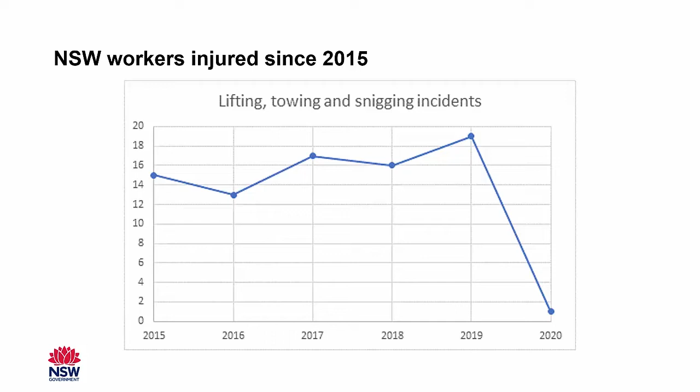When incidents such as an unintended release of mechanical energy occur, mine operators must review and revise control measures at their mine sites. We have reviewed control measures associated with 2 lateral load shifting incidents that occurred in 2019. Since 2015, 81 incidents have occurred in the New South Wales mining industry involving lifting, towing and snigging. 37 of these incidents resulted in workers being injured.

We have published information on our website about these 2 lateral load shifting incidents. The first was an investigation information release titled "Worker Injured Releasing Jammed Conveyor Chain," and the second was a safety alert titled "Flight Bar Ejects Hitting Worker While Installing a Conveyor Chain." Both of these are available to download from our website at

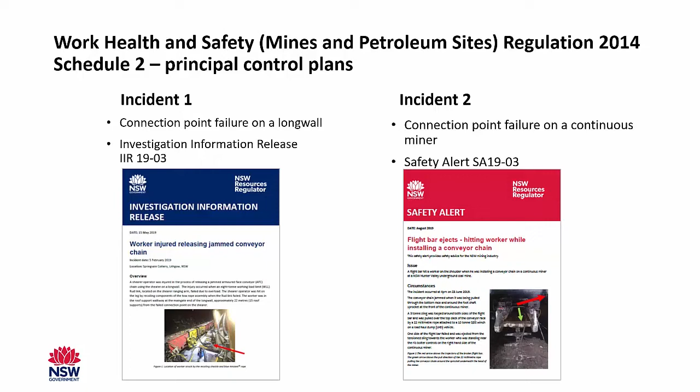www.resourcesregulator.nsw.gov.au. The armoured face conveyor, known as the AFC, had a flight bar jammed in the bottom race on an earlier shift. It was possible the chain or a flight bar had been damaged while freeing the chain. The workers had tried to use the pivot arm tensioners to slow run the AFC, but the tailgate pivot arm tensioner was not operational. It was determined the main gate drive pivot arm tensioner would be operated in reverse, and the shearer would assist by pulling the slack AFC chain from the main gate drive.

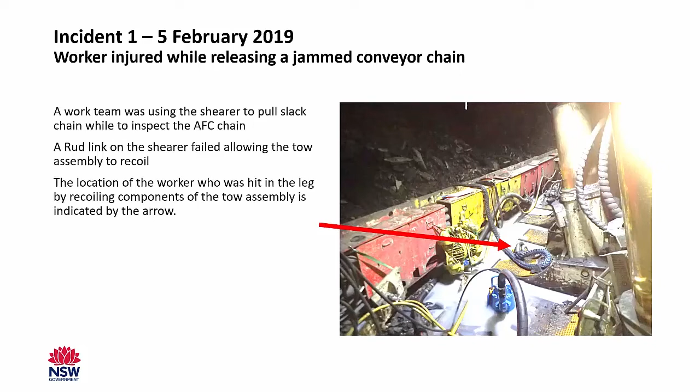Workers were tasked with inspecting the AFC chain for damage. The inspection required running the AFC chain in reverse. The towing assembly used consisted of recovery strops, synthetic rope, bow shackle, and a rud link. Shortly after the load was applied to the towing assembly by tramming the shearer, the rud link failed. The bow shackle and rope recoiled back towards the 3 workers at the main gate. The bow shackle hit the shearer operator on the lower right leg.

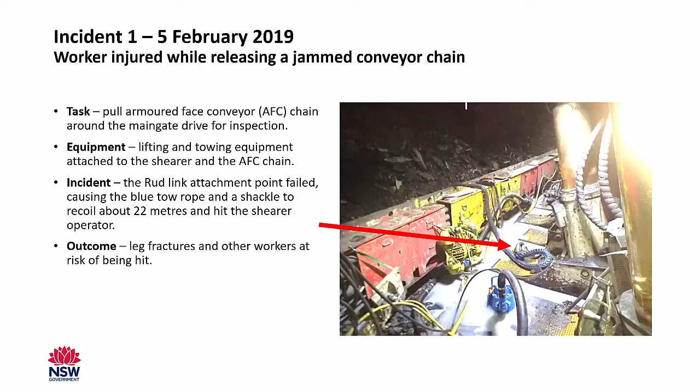This diagram shows the lateral load transfer system that the workers set up. 2 50-tonne Kevlar tow strops were used. A strop connected each strand of the AFC chain to the tow rope. A single 42mm synthetic rope was connected between the tow strops to a large bow shackle. A bow shackle connected the rope to the shearer. The shackle had a working load limit of 35 tonnes. The attachment point on the shearer was an 8-tonne rud link.

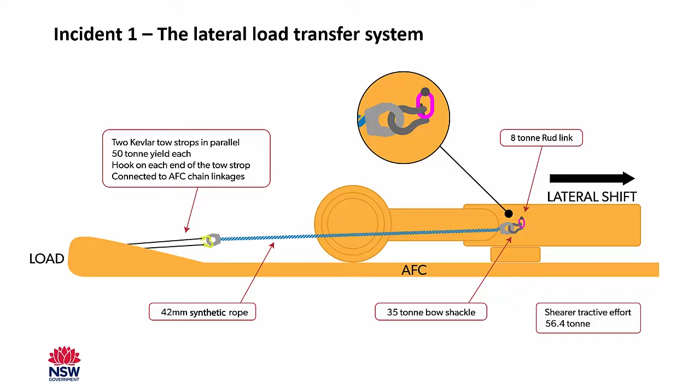The workers did not know the tractive effort of the shearer. It was capable of a maximum tractive effort of about 56 tonnes. The tractive effort of the shearer could have been reduced by disengaging one of the 2 drive motors. A safe working procedure did not exist for this task. The previous shift had conducted a JSA, but this was not used. The workers did not review the JSA nor conduct their own JSA. The workers had not completed the required training.

3 workers were in the vicinity of the main gate ramp pans to inspect the AFC chain as it moved around the main gate drive. The shearer operator was in the roof support walkway, about 22 metres or 15 roof supports from the failed connection point on the shearer. Because the rud link failed on the shearer, the release of energy caused the rope and the large shackle to recoil towards the workers. 2 other workers were also at risk of being hit.

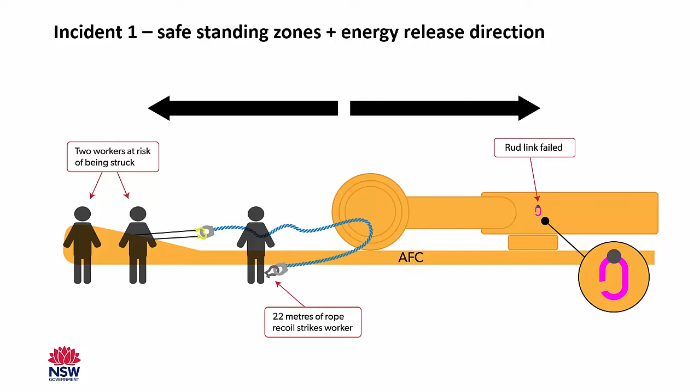This diagram shows the rated capacity and the breaking load for each component in the lateral load system used. When the breaking loads of the components are compared, the weakest component in the system was the rud link with a breaking load of 32 tonnes. The shearer was capable of exerting up to 56 tonnes of pull force, therefore exceeding the strength of the rud link. Independent metallurgical analysis identified the rud link fractured across 2 opposite corners.

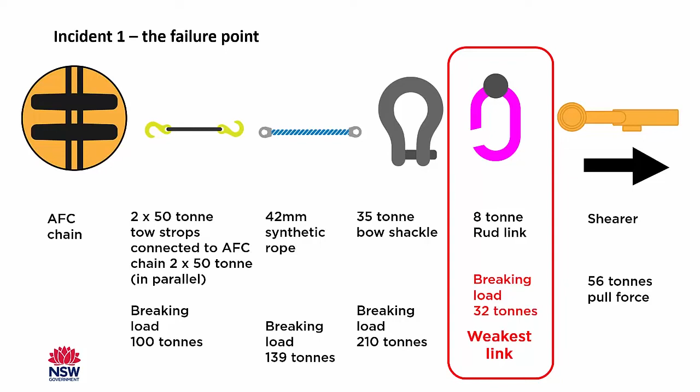There was no fatigue or pre-existing cracks on either fractured surface. The deformation of the rud link indicated a sideways and twisting loading of the link, not in accordance with its intended use. Our investigation information release provides information about the incident and how to safely use a rud link. The shearer original equipment manufacturer has also published a technical bulletin on the use of lugs and links fitted to the shearer. Although the breaking load has been discussed, the working load limit is the primary rating used to select components for lifting and snigging applications.

The conveyor chain had broken on a continuous miner and was being reinstalled. An LHD and QDS winch were being used to pull the chain back onto the miner. As the chain came around the foot shaft sprocket, a flight bar jammed. One side of the flight bar failed and was ejected, striking a worker in the shoulder. Other workers nearby were also placed at risk.

This diagram shows the lateral load transfer system the workers set up. A QDS winch on an LHD was connected to the chain by a 22mm synthetic winch rope. The capacity for the winch was about 10 tonnes. The 22mm synthetic winch rope had a yield capacity of 42 tonnes.

A 3-tonne rated sling was looped around each side of the flight bar and threaded through the eyelet of the rope. The load on the system at the time of failure was not known, as the conveyor chain jammed. One side of the flight bar failed and recoiled towards the spotter, who was on the platform. The workers did not have a safe work procedure for the task.

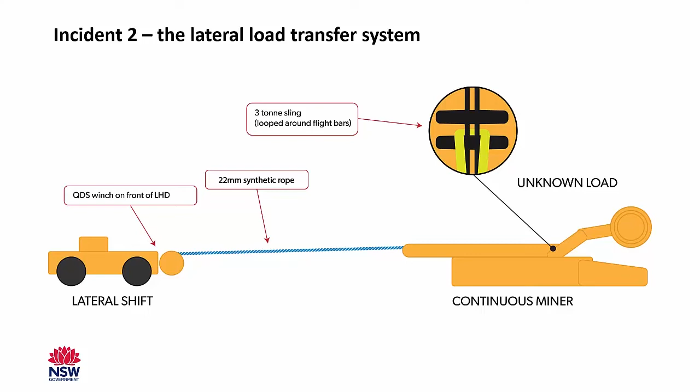The manufacturer's manuals did not provide specific information about where or how to connect the rope, nor details of how to pull the conveyor chain onto the miner. No-go zones were not specified. A worker was on the platform of the continuous miner acting as a spotter. A second worker was adjacent to the boom of the continuous miner, acting as a spotter.

A third worker was standing beside the winch. A fourth worker was in the LHD operating the winch. The worker standing on the platform of the continuous miner was hit in the shoulder by the flight bar when it failed. The other workers were also at risk if the load transfer system had failed in a different way.

Before the incident, the 22mm synthetic rope had failed. The rope was repaired and the task continued. The initial failure was not reviewed nor assessed, and the workers did not put additional risk control measures in place.

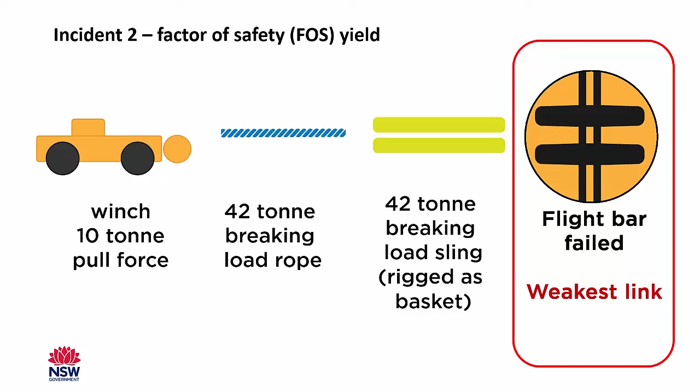This diagram shows the breaking load for each component in the lateral load transfer system. The winch was hydraulically set up to apply a 10-tonne load. The breaking strength of the flight bar was unknown, but was not expected to fail. For a task set up in this manner, the LHD should never be driven, as the maximum tractive effort of the machine becomes the load.

In reviewing both of these incidents, similar causal factors were identified. There was no safe work procedure existing for either task. The weakest components were not identified because the breaking loads of each of the components were not understood. There were problems with training and competency of workers, and supervisors were not present during both tasks.

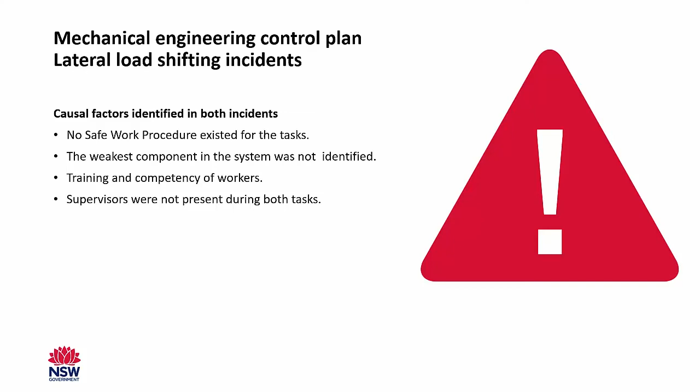In review of both case studies, there were similar causal factors identified. Connection point strength was less than the tractive effort used for the task. The weakest links were the connection points selected. Incorrect no-go zones were identified. And earlier events before each incident of equipment failures had not been reported and reviewed by supervisors.

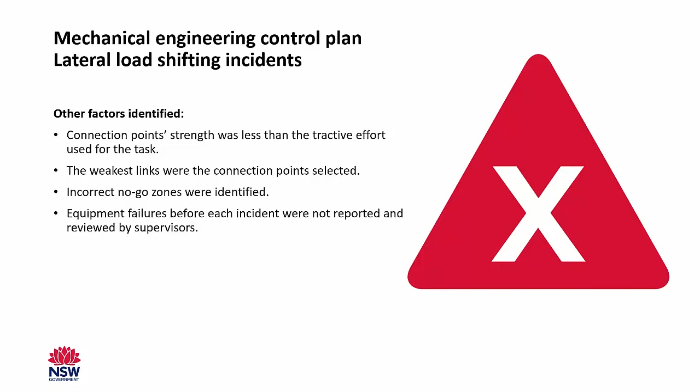Our recommendations: develop safe work procedures for lateral load tasks. Dynamic lateral shifts are complex tasks. The New South Wales Resources Regulator recommends the following. Mine operators should review their lifting and towing equipment management plans to ensure all activities using lifting and towing equipment are appropriately addressed, including non-routine towing activities.

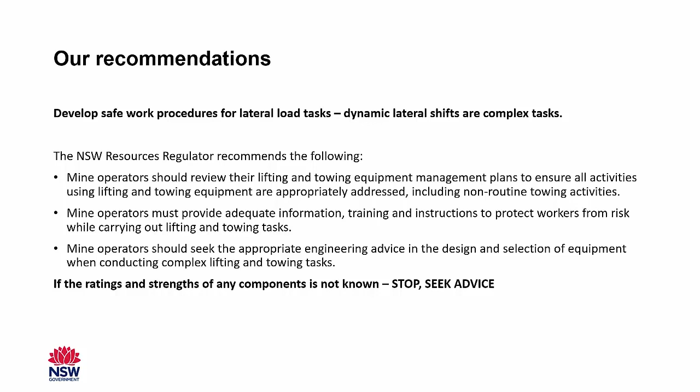Mine operators must provide adequate information, training and instruction to protect workers from risk while carrying out lifting and towing tasks. Mine operators should seek the appropriate engineering advice in the design and selection of equipment when conducting complex lifting and towing tasks. If the ratings and strengths of any components are unknown, stop, seek advice.

When planning a task involving lifting or towing, the rating and yield load of all components, including the connection points, must be considered in the design of the lifting or towing system. Additionally, the structure supporting the connecting point should also be considered. People designing towing, pulling or snigging activities must know and understand the maximum forces capable of being applied to the system, such as tractive effort or weight force.

Safe standing zones must be established to account for component failures within the system. Mine operators should review compliance reporting systems to ensure workers notify a supervisor when pulling and lifting failures occur. Workers should not resume the pulling or lifting task until supervisors are notified of the failure and the incident is reviewed with additional controls put in place.